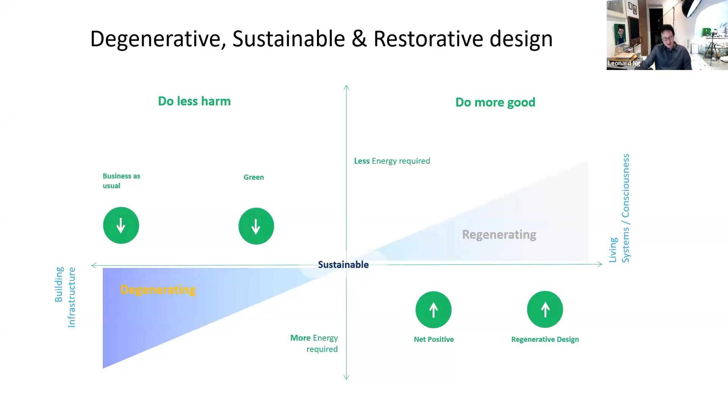All our methods of really designing for sustainability, I believe, are not sufficient. We need to look at regenerative design, meaning we need to remediate the damage that we have done to our environment. Otherwise our world will become more and more hostile to living.

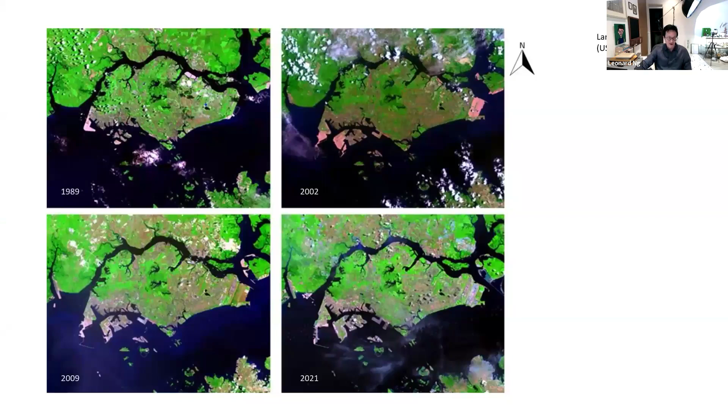After many decades of development, I think we reached a point where we realized we need to improve our environment. This is when the government came out with the policy of incorporating greenery within our built environment, looking at opportunities wherever we find them in our three-dimensional space - on the roof, on the side of buildings, and on the ground - in order to create spaces for nature and greenery. And this has driven the way we have designed our physical environment since.

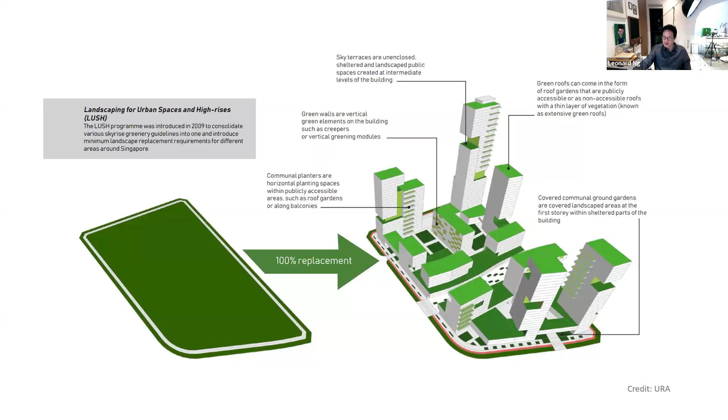I work for this company called Henning Larsen. We are a Danish company, part of the Ramboll Group, which has 18,000 engineers and designers. I'm the director for Asia Pacific operations. We offer architectural, landscape, and urbanism solutions. But we consider ourselves more than landscape architects or designers - we consider ourselves first and foremost as champions for nature, where we look at the best qualities of nature and try to highlight that.

We try to be sensitive in the way we treat design within environments. The second thing is we consider ourselves as ecosystem thinkers. The problem with modern day challenges is they are very complex and multi-dimensional, so in order to solve problems effectively, you need to think in terms of ecosystems and networks and how your solutions can be multidisciplinary and multidimensional.

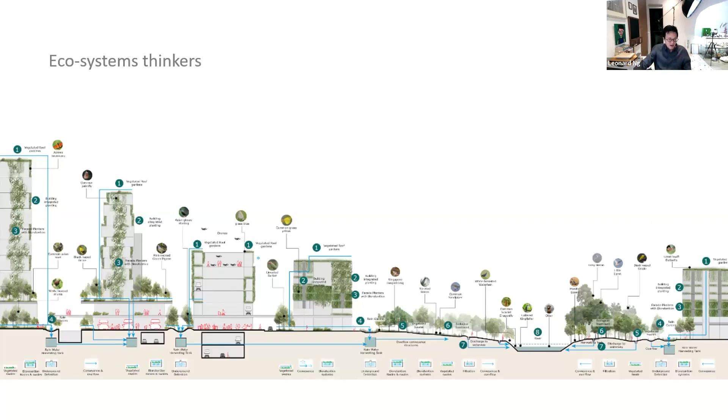Finally, we consider ourselves as storytellers. At the end of the day, we are designing for people to build memories, for people to build relationships - to design compelling spaces so that you will return to them. With that in mind, I will start talking about a few projects to showcase our design philosophy.

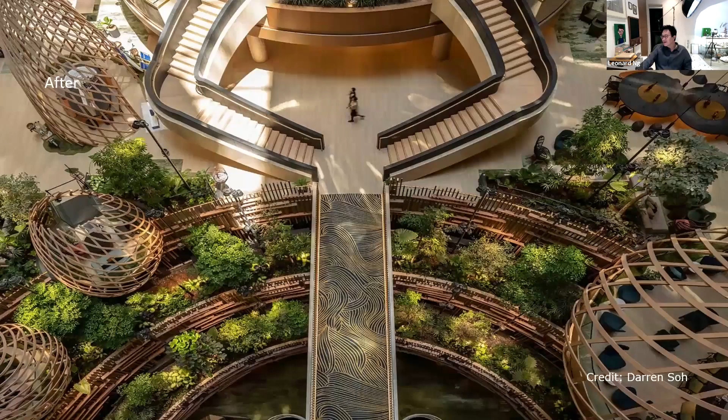We were also told to design the interior of the hotel, which had this really old-school 1970s type interiors. What we did was take it and convert it into these beautiful green landscape areas, using only real plants and energy-saving lighting. On a normal day, you can hear birds singing in here.

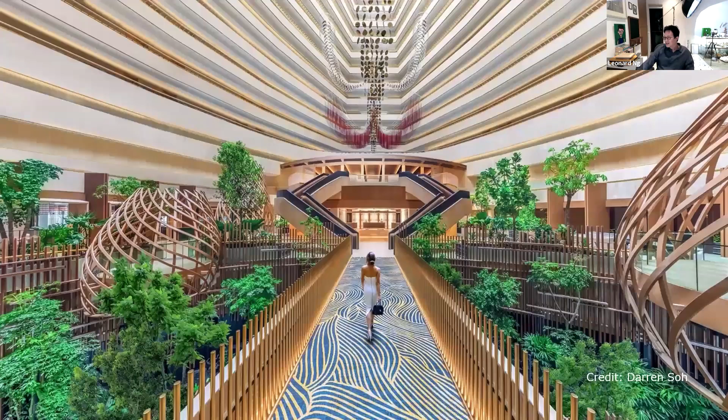What happens is it has transformed the place where it wasn't well used - now it's actually one of the most popular spaces. People actively seek out this space for meetings, to meet in groups, for lunches, for discussions. This becomes an asset instead of a dated design, and it's now one of the most popular features within the hotel.

So we wanted to make this place handicap friendly, but not only that, we wanted to bring the spirit of the village into this integrated development. Kampong in Singapore, in Malay, used to refer to a village, and one of the core characteristics of a village is a strong community spirit. We wanted to embed that into our design.

We also considered including biodiversity as an attraction where nature can coexist in close proximity with residents. We wanted to create a beautiful seasonal look where instead of looking at a hard roof, you see a beautiful green hillside. We also wanted to embed the culture of cultivating agriculture as a part-time activity for the senior citizens.

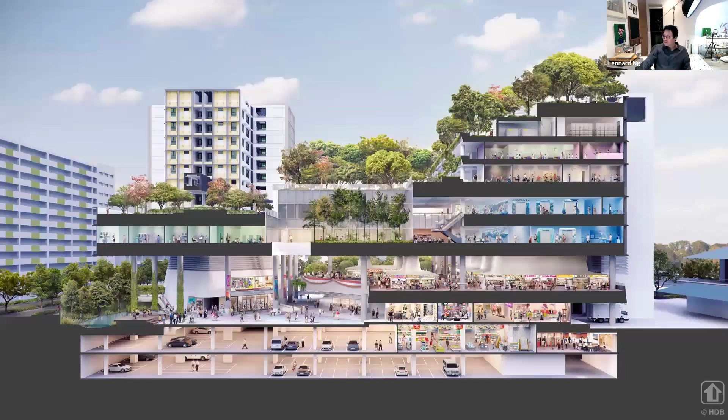But we had to do this within this very dense, built-up, integrated design. We worked with an architect called WOHA - they designed the building, and we designed the landscape in this elevated ground plane that serves as the new village square. If you see the users at different levels: the transport level at the basement, then a supermarket, then a food court, then day clinics, and a childcare center.

All the users are segregated through the vertical layers. But what we wanted to do is make the landscape the binder to bring the community together. If you look at it now, the building will look different without the landscape, and likewise the landscape will look different without the building. I think that's the magic of this design - the seamless integration of these two strong elements has created something new.

We looked at how we create this landscape, and we embedded fruit trees. We embedded biodiversity trees to attract butterflies, bees, and birds. We embedded canopy trees for shade and for cooling effect. So all the landscape design was done with specific KPIs in mind to achieve a specific outcome.

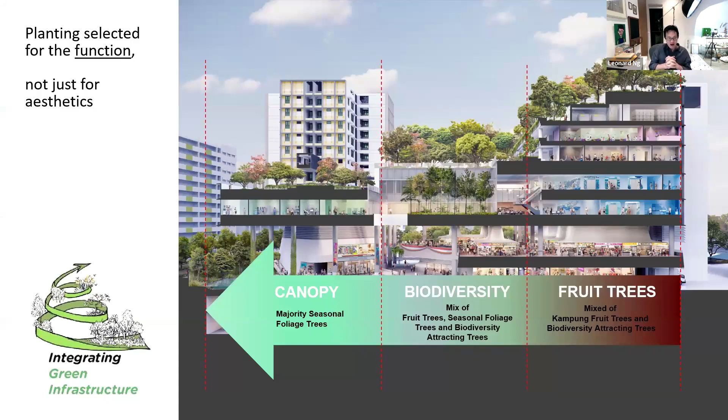We were also the water engineers, and we embedded the water system, working with the building engineers, to seamlessly incorporate and integrate it within this dense built environment. With the green roofs, we collected all the water, and treated it in vegetated filters.

We collected it in rain gardens and rain features to beautify the space, and kept it in irrigation tanks. We recycle it for irrigation before we output it into the public system as cleaner water.

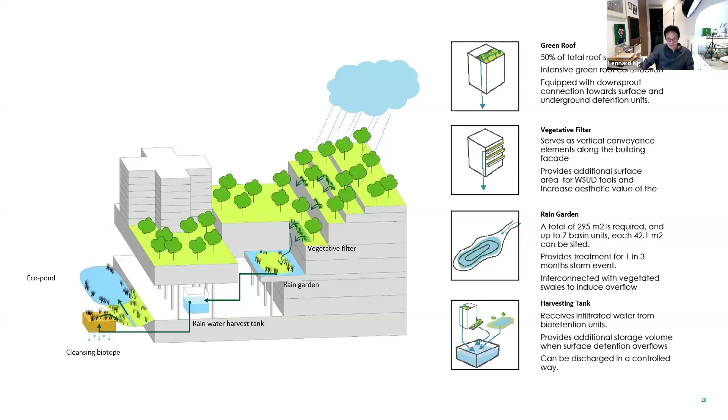This is some of the systems you see functioning now. They are all gravity fed, and this happens during a storm event. The rain chains, rain curtains, and cleansing biotopes are actually phytoremediation beds used to treat the water and make it cleaner. The phytoremediation beds drain into bioswales, where the plants uptake nutrients - nitrogen, potassium, and phosphorus - and produce cleaner water before it's discharged into the eco pond, where nature flourishes.

Then it goes into the public system as cleaner water. All this is done because ultimately the water that falls where we live is the water we end up drinking. Singapore is a small country - we don't have a lot of space to collect water. So we have to make sure all the water that flows into our drains ends up cleaner, so that it takes less energy to treat.

So this is part of the island-wide initiative to produce cleaner water.

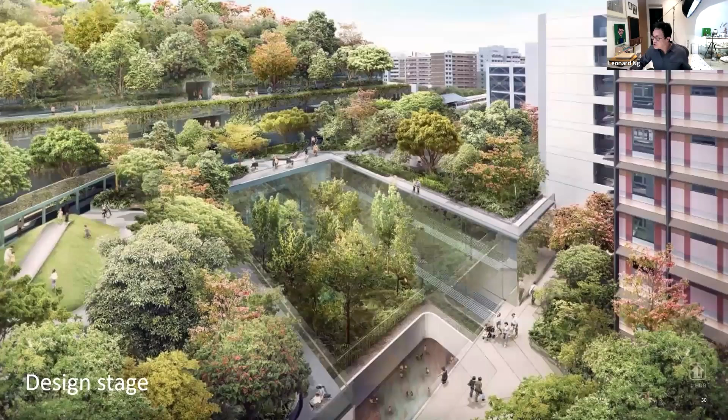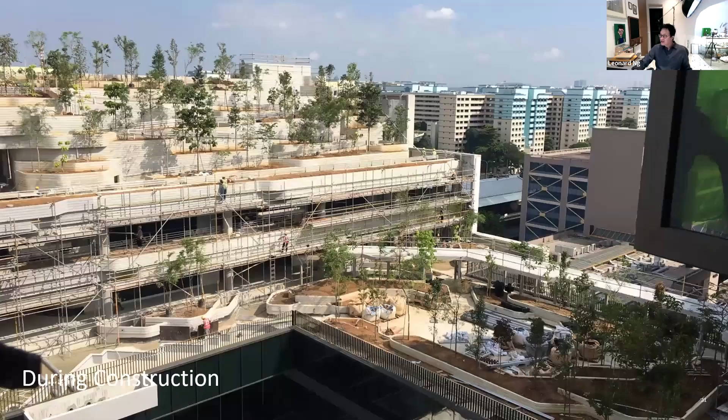This was the rendering we did during the design stage to show how this landscape feature on this terrace roof will look. This is halfway through implementation - you see the roofs still quite bare. So if you didn't have the landscape, you'd see only the roofs.

But we wanted to plan the landscape first to serve several purposes: to give the senior citizens in the tower blocks a beautiful view, to shade the roof against heat, and to provide space for leisure and for nature. Technically it's quite challenging though, because we have to understand how each of these plants grow and their requirements.

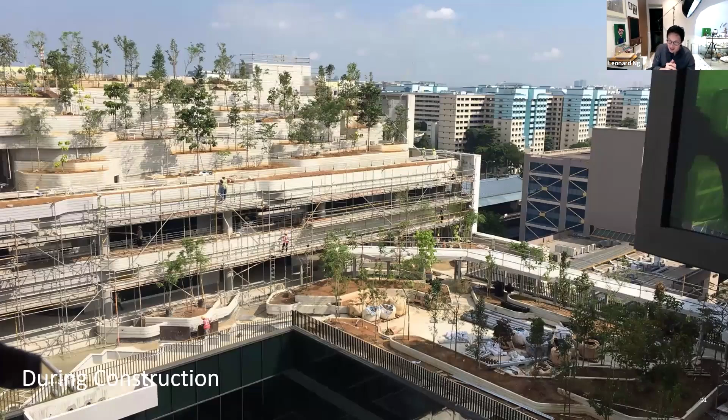So for each of these planting beds, we have to determine the soil depth that is closely related to the species of plants that we are going to incorporate. This type of design is only possible if we work closely with the architects and engineers from the start. This is not something you can retrofit later. You have to do it from the start, otherwise it would not succeed.

And then finally, 12 months after opening, this is how it looks like. The view is totally different now. It is green, it's no longer hard. The spaces underneath these green roofs are a lot cooler. There is space for the senior citizens to exercise and for their grandchildren to play, but also it's a space where you find butterflies, bees, and birds.

So it has transformed the way the citizens have used the space, right? It has really improved the quality of life. And now we are rolling out more and more of this type of integrated hub project in Singapore because of the success of this pilot project.

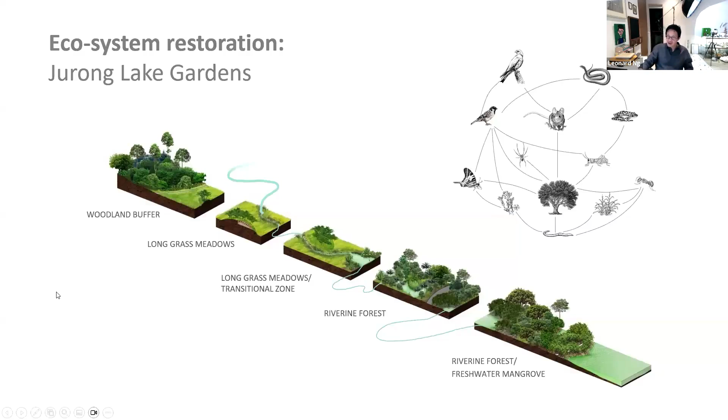The next project I'm going to talk about is in Jurong Lake Gardens, also in Singapore, and is about restoration of ecosystems. This part of Singapore used to be part of the large industrial estate on the west side of Singapore. Due to rapid urbanization and industrialization of Singapore, we had to redevelop all the freshwater swamp forests, and this was part of the freshwater swamp forest then.

So when we were approached for this competition, one of our ideas was to bring back the freshwater swamp forest, but in a friendlier manner. We wanted to showcase a defragmented freshwater swamp forest. So one of the initiatives was to create habitats for birds, in this case, grey herons that were found there.

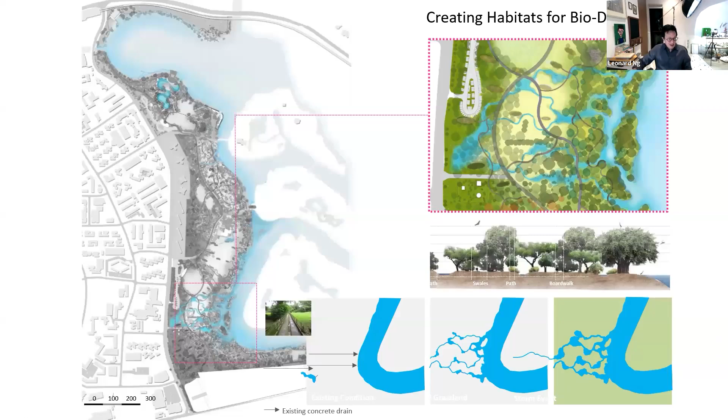So we create river deltas for the bird to feed, and mud flats, and we created islands for the birds to stay, and then we created mud flats for the birds to feed.

But we also wanted spaces for humans to enjoy nature without disturbing wildlife. So what we did was layer it: we put humans on a narrow pathway that's elevated over the landscape. So they are confined to these narrow pathways, but we allow the birds and animals to use the space on the ground freely.

So the ducks, the grey herons, the monitor lizards, they're all moving through the space without coming into conflict with humans. We also selected the plant palette to mimic what was here before, lowland freshwater swamp, but displayed it in a manner that is not unfriendly, so that people can get close up without getting, for example, injured by the thorns. This design thinking is very successful at deconflicting the needs of man and nature while allowing them to live in harmony.

We also thought about how the water will move and behave through the season. So we worked closely with the water engineers to make sure that the water can move in and out so that seasonally you see different conditions.

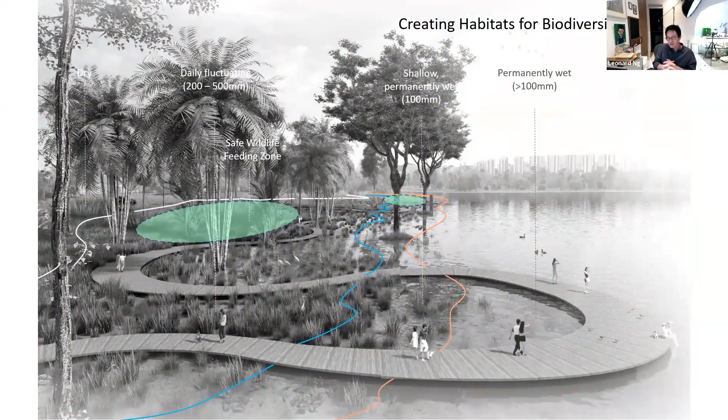Sometimes the water will move in, but when you're walking on this boardwalk that is full of bird life, sometimes you see otters, grey herons, monitor lizards, and you get in touch with nature, which is a difficult thing to do in Singapore because you're living in high rises. So these are really precious moments that build memories for future generations.

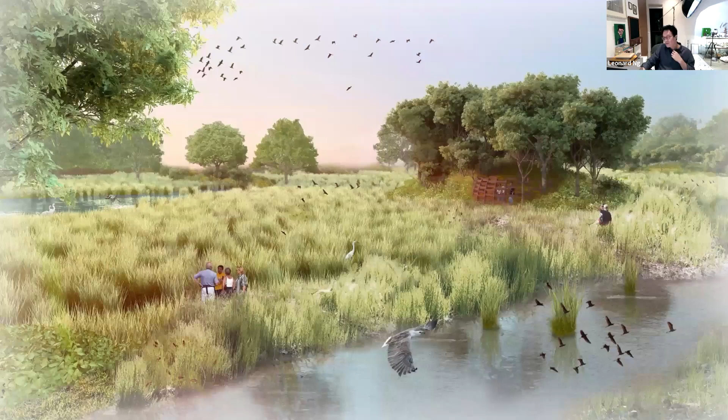And this was exactly the effect we were trying to create. We wanted to put the animals and the birds back in a place where they can live freely, and they can fly over your head in flocks.

The last project I'll show you here is our first project in Singapore, which is Bishan Ang Mo Kio Park. It's actually part of the widened catchment study for Singapore, where we are trying to change mindsets about the residents' relationship with water.

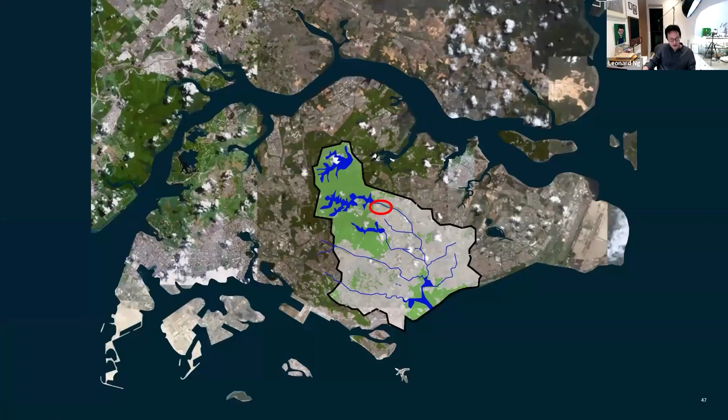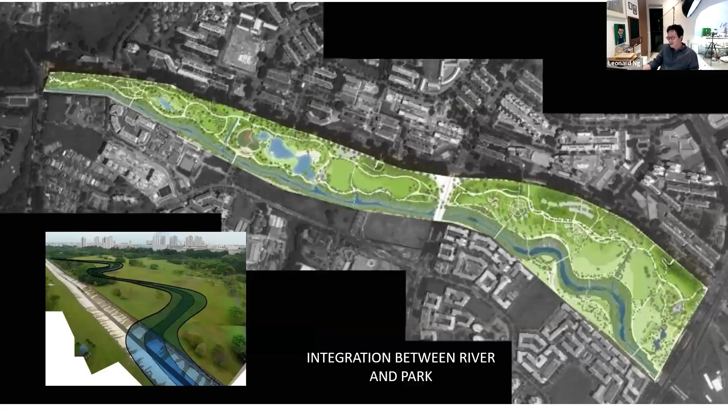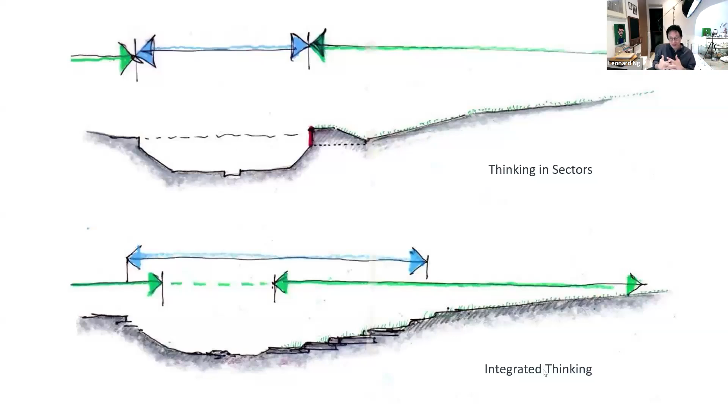What we did was we took this 3-kilometer long concrete canal and proposed creating a natural river instead. But it's not just a natural river, it's really about changing mindsets. Instead of thinking in sectors where the canal is part of drainage works, the park is part of the park authorities, and this is for the building authorities, we had to change the way we think. Now we are required to think in an integrated manner, where there's no yours and mine, but it's ours.

We were also given the requirement to design for climate change. The old canal was designed for a 1 in 5 year storm event, but because of our climate projections, we now had to design for a 1 in 10 year, even 1 in 25 year storm event. So we had to make sure the new natural river we designed could accommodate the higher storm flows.

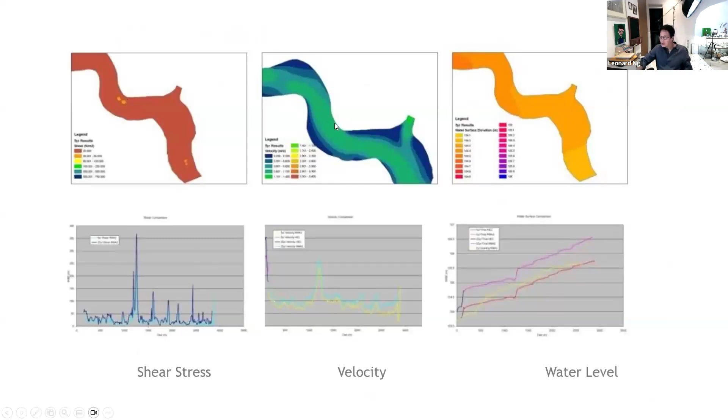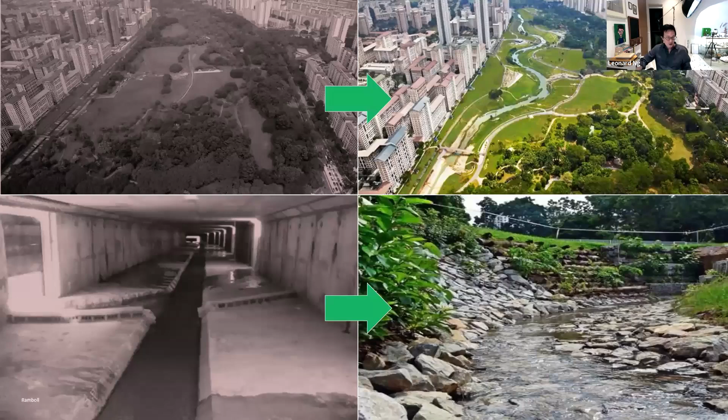We had to do extensive hydraulic modeling, and then did a lot of pilot tests. This was before - you see the canal running top down as a straight line, and the bottom picture is actually an underground drain. We broke it up and made it into this natural, beautiful river and open drain using nature-based solutions. We tested 13 different kinds of nature-based techniques, in this case, soil bioengineering, where you use natural materials to act as concrete to retain the soil and prevent soil collapse.

Instead of the previous design, which was really a monofunctional drain that only performs the function of conveyance, surrounded by fence and therefore excluded people, now it has been converted into this natural river that feels seamless with the park. The difference between this and that is this is not monofunctional, it's multifunctional.

It can be flooded during a storm event, but during dry days, it looks like this. It provides spaces for nature. There is slow water, fast water, deep water, shallow water, high light, low light, and the different conditions provide different biotic conditions for different species to prosper.

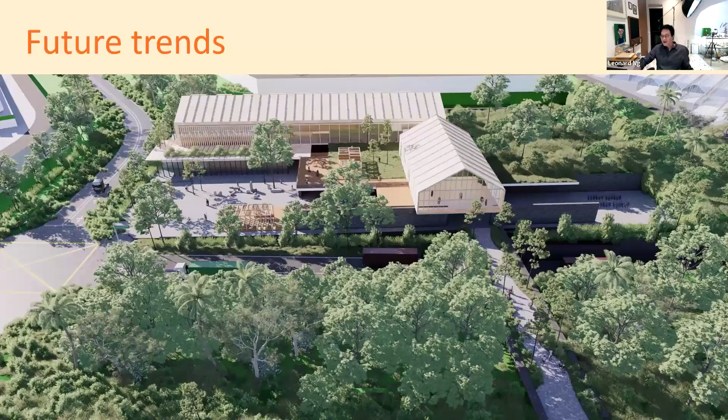And finally, I have to wrap up by talking about some future trends. Right now, we are developing a food resiliency master plan for the Singapore government, where we provide spaces for high-density food production, but also incorporate leisure, ecological considerations, coastal protection, and education. This is a rendering of the educational and production facility for this food resiliency master plan.

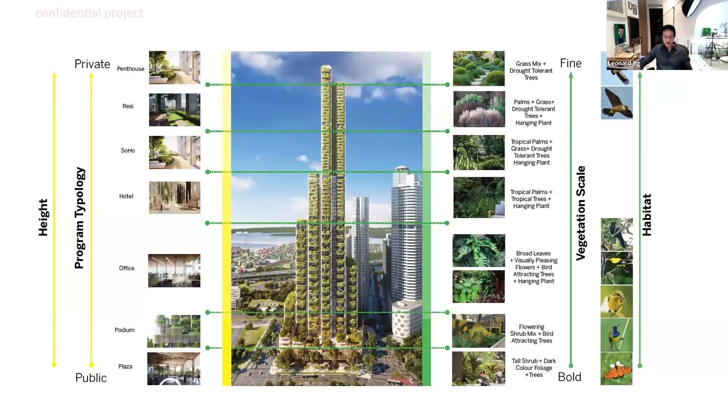High-rise building, which is pretty common in Singapore, but what is maybe unusual, especially for places like India, is the incorporation of greenery into this super high-rise. We are working on several projects in Singapore that incorporate greenery at multiple levels. We are also thinking about how we can use landscape design and engineering to improve thermal comfort, a big topic in Singapore, and I'm sure in India too.

We have over the last few years recorded record temperatures in summer, and it's made it really uncomfortable. So in all our landscape proposals, we think about how we can improve thermal comfort in all our design.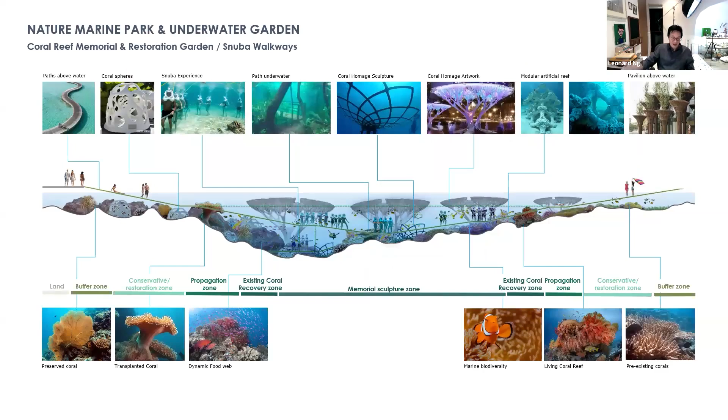We have also looked at design in the sea. In this case, a project in the Maldives, where we looked at how we can remediate bleached coral reefs and make it into an attraction, a tourist attraction.

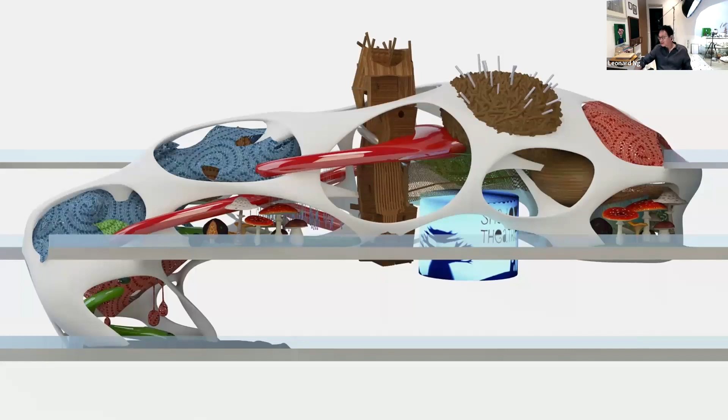We are also looking at the new adaptation of playgrounds. This was a design we did for an airport where we reimagine the future of play. This project we did with Zaha Hadid Architects.

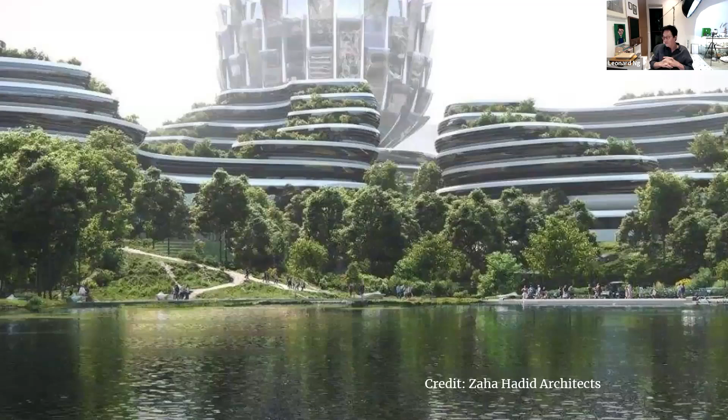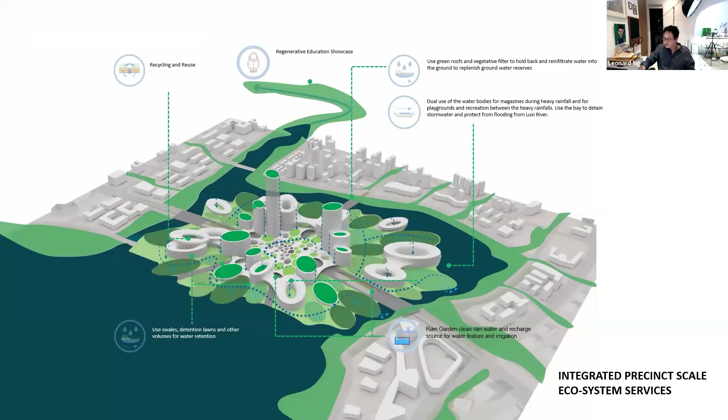This is an island that was created for high-tech industries, for knowledge industries. But what was interesting with this island was the creation of integrated precinct-scale ecosystem services, where green, water, thermal comfort, biodiversity, car-lite society, all incorporated within this design to produce this compelling urban development.

With that, I'd like to end my presentation. Thank you all for your attention.

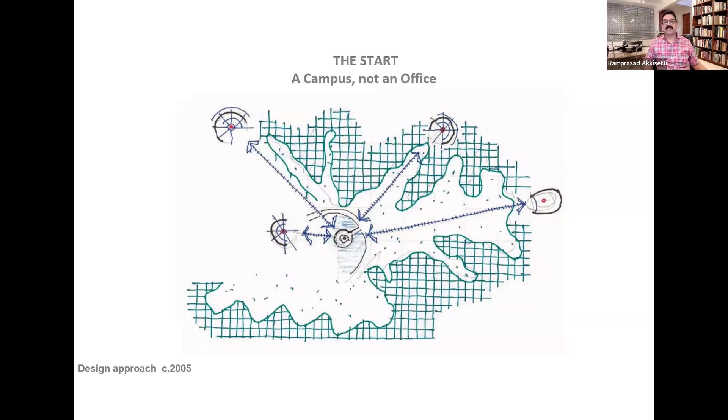When I look at Suzlon, we were asking: can we design a building that is both Indian and modern, at the same time sustainable, and can it generate energy and set an example at a time when everybody is building glass boxes? So we incorporated water bodies and age-old iconography of Indian temples. We did not build a temple, we built into the design the motifs that we could borrow. We built the Deepastambha, which tied all the buildings together into a central plaza, making it a space everybody could look into as the central space to congregate.

Suzlon is a wind energy company, and this is how the campus looks. There's a lot of green features that were part and parcel of the material selection itself. We had louvers, so sun rays would be dampened by adopting these louvers, we had overhangs, and we had water bodies. This is how the louvers function: they give the transparency needed for people sitting inside, but at the same time they block the sunlight coming into the building.

This reduced the light falling onto the walls, cutting down on the ambient air conditioning temperature and thereby the cost of running the air conditioning. All this water would circulate — this is all gray water, which we were reusing and recycling. The building envelope had glass as well as louvers. We also had, for the first time back in 2008, VRV water-cooled systems that greatly reduced the temperature to almost 27 degrees.

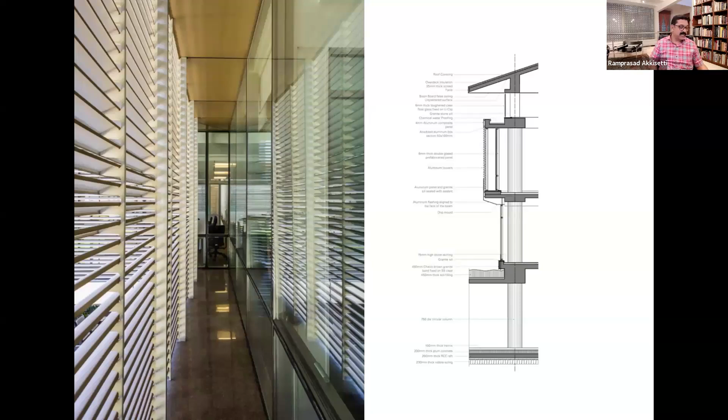Some of the building's sustainable features: we used PT design, which helped reduce steel by almost 50%, and we used less concrete, to the tune of 15%. The sizes of the beams planned matched the sizes of ready plywood, which reduced cutting and wastage. There's usually a huge amount of wastage of construction material because we want to arrive at certain shapes and sizes, but when you plan your construction modules and systems well in advance, you can integrate industrially manufactured plywood sizes and glass panels. There was also a natural drainage system that helped in the post-construction period.

Then we harvested 100% rainwater. The treatment sewage was treated and then used for the landscape as well as for flushing. There were too many parameters for me to go into this particular presentation.

If I look at it, Suzlon, by the end of the construction, garnered almost 10 different national and international awards, which made it a very important project in the landscape of architecture in India back in those days. The client was happy.

What we could design was a building that was modern, that was a net zero building. It was sustainable. It has won all the awards. It has got all the ratings, both US Green Building Council as well as TERI 5-star rating. And plus, what it made is one of the most important things, it brought happiness.

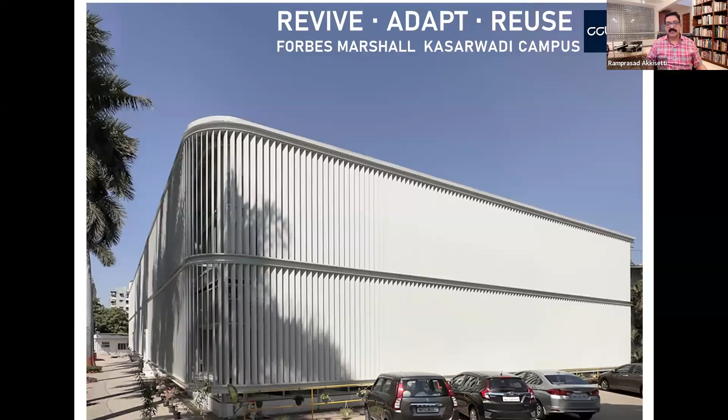Now I'll quickly go to the next project. I'll call this project an economically sustainable project, designed recently, about 3-4 years back. This is for a factory building. You can see this was a factory building earlier. On one side there was a train line, and on the other side a metro line and a highway. That did not allow us to break the building.

If we had broken the building, we would have had to lose the plinth area, and that was pretty large. When we designed this building for Forbes Marshall, we said, how about we retain the wall, the columns, the slabs, and the plinth so that we can build over it? So we changed the facades and all the systems, and went into what is called a reuse and readaptable mode.

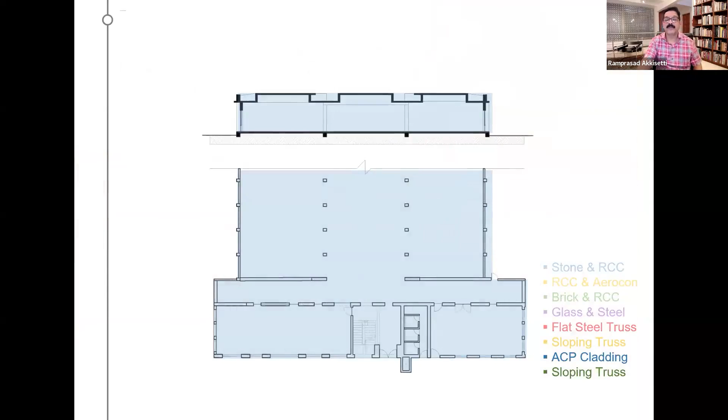This is how the building looked in the 1950s. It was a factory, and over time it got added on to. This was the original factory building, and all these colors represent different additions at different decades. This is what was given to us, and that resulted in a patchy built form.

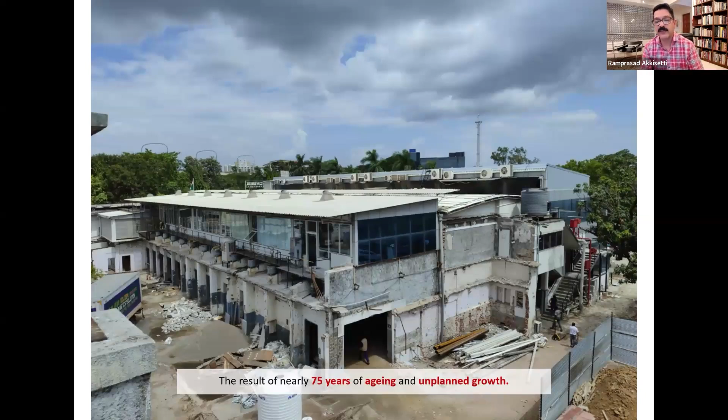So you can see this was the building. It was almost 75 years old, and if we demolished it, we would have lost the plinth area, which we did not want to lose. So we converted this old factory into a new office space for about 300 people to sit and work.

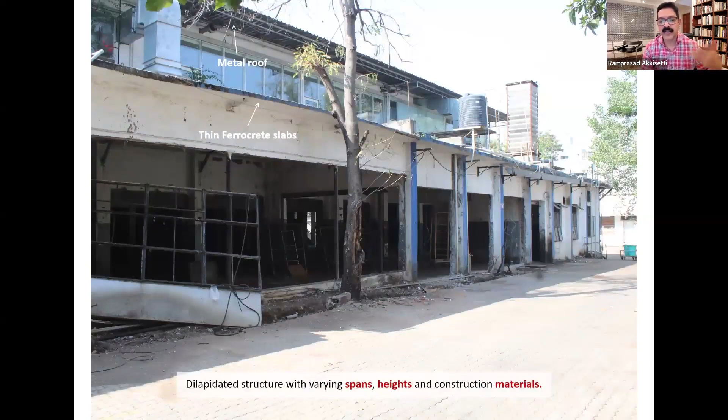This is how the factory looked. Various kinds of materials were used over time. It aged and it grew. This is how the factory was - a weakened structure, and the facade was not consistent. So we needed to integrate the different patches of the building by unifying the facade.

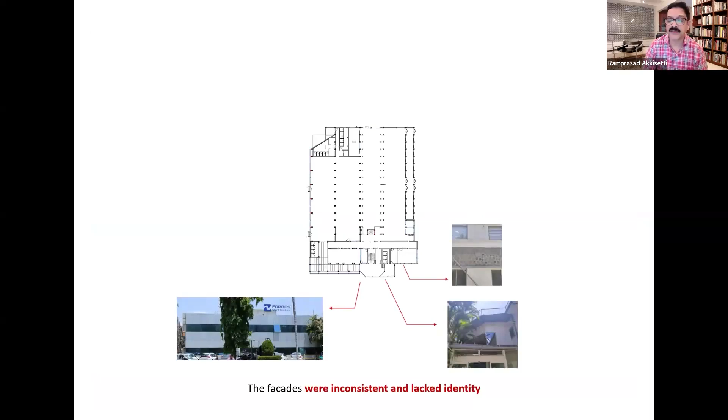So we changed the factory building into a corporate office for 300 employees. It was modernized, and we created a louvered facade that was both functional and sustainable. We revived it, readapted it, and reused it.

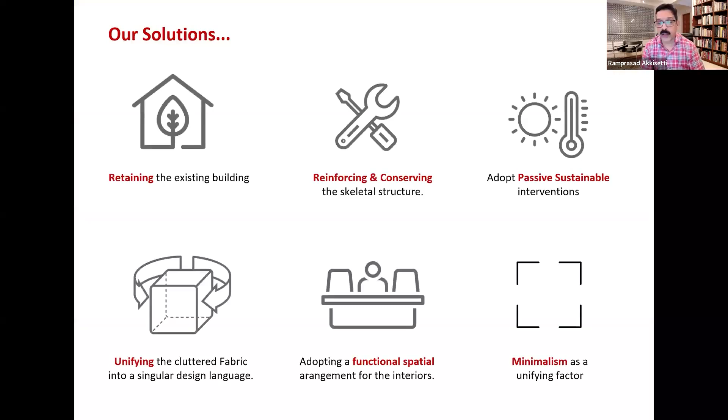In short, I can't explain all this in the little time we have. What I'm going to show is the building which was given to us, and this is the building which we made from what was given to us, by adding an extra floor on top and a light roof structure.

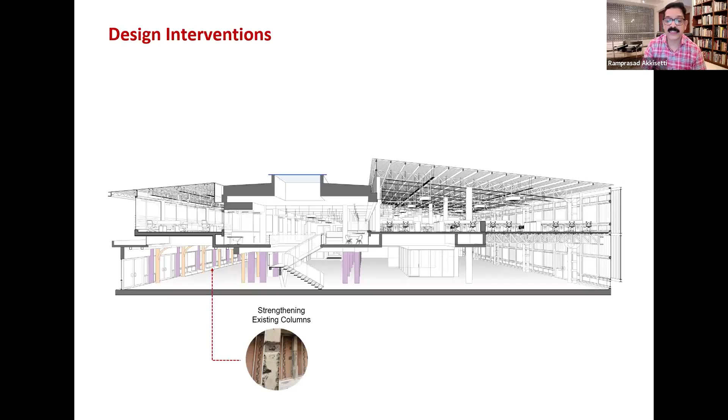We did a lot of auditing and found some of the columns were very weak. We needed to retrofit the columns - you can see these were all retrofitted to hold greater strength. Then we incorporated skylights into the existing slab.

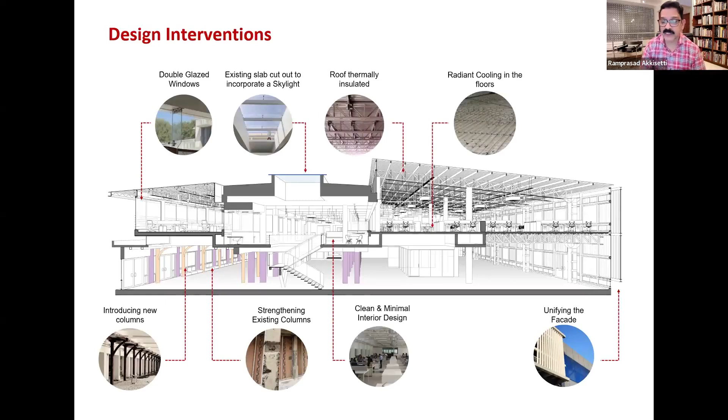And then we used radiant cooling in the floors, which greatly reduces the load on the air conditioning. That reduces electricity consumption, thereby making economic sense.

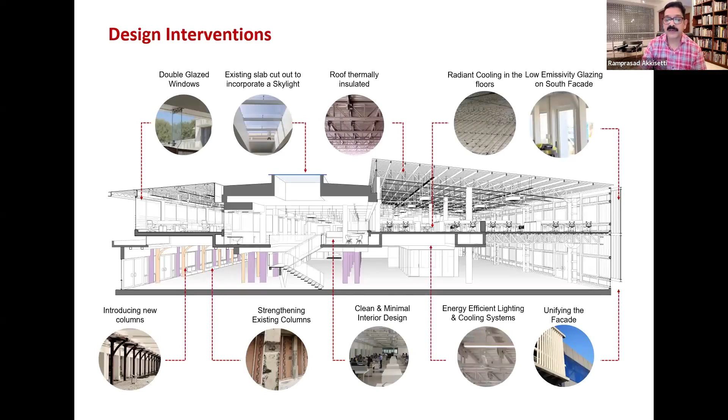So an open office space was created out of this factory. And this was one of the buildings out of all the 5 buildings surrounding it. So now we are in the process of integrating all the other buildings also, thereby expanding it.

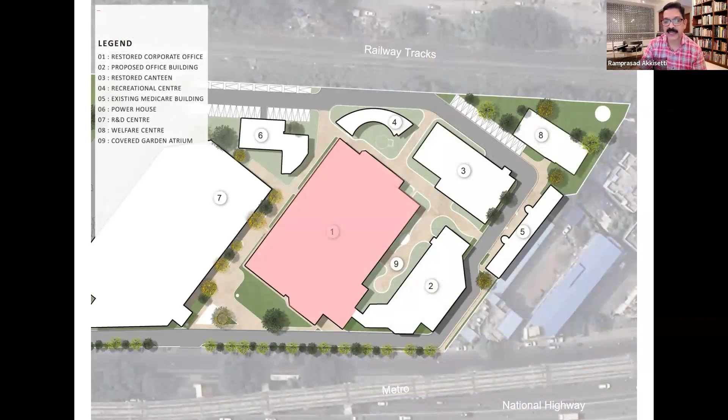Doing this particular project, we found it was almost similar to an open heart surgery, where the person is alive and you're trying to attend to a heart that was damaged. We were building this entire factory, converting it into a corporate office while they were still working there - the operations were not shut down for the factory.

So this is the building which came out eventually. These are the images of how it looks now, with a lot of light coming into it.

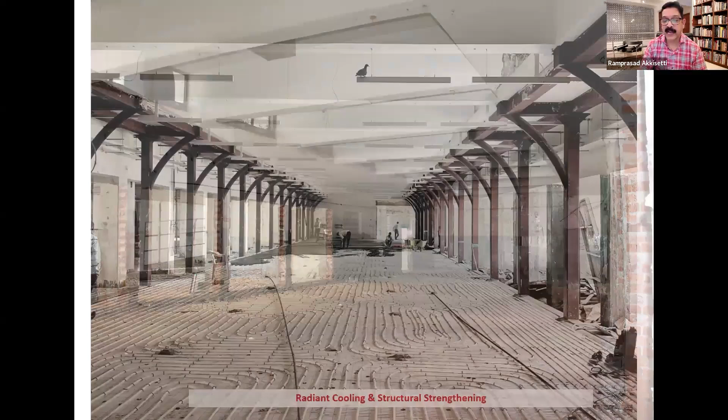Skylights opened up, and this is how it was, and it became this—you can see the difference. This is how it was, and this is what we made. This is how we included passive cooling, radiant cooling, and then strengthened the columns. The columns which were strengthened were also made to look beautiful, and they were exposed to show that we have strengthened them, and they are now a sculptural part of this workspace. So this is how it became.

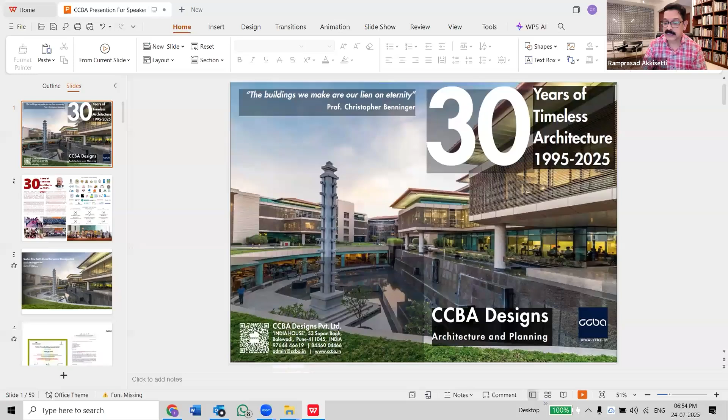That's it. So where is my—can you put my face? Yeah. So in short, what I was talking about is I was purposefully moving out from landscape sustainability, or let's say ecological sustainability, to introduce two new words to my audience.

One was cultural sustainability in the form of Suzlon, where we are already moving out from building what are called Indian modern buildings. The other was economic sustainability, where instead of demolishing and building something new, especially in India, we work at scales of about $25 per square foot, as against the rest of the world, which builds at maybe 10 times more per square foot. So we have to be very careful when working in Indian conditions.

So this is all that I have to say. Thank you.